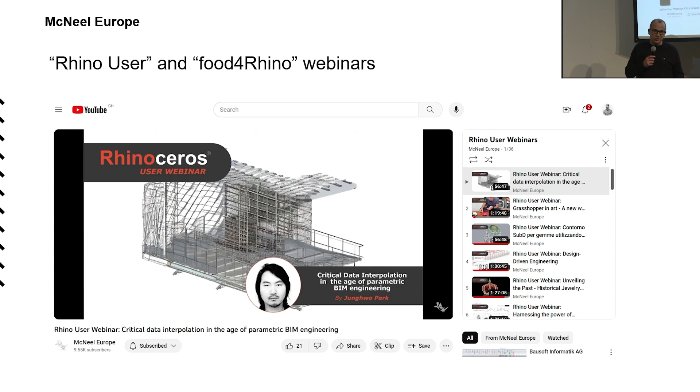And in October, we released Rhino 8. It has been amazing. During the last months, we've sold thousands of upgrades.

I'm not going to talk today about what's new, but you have this page on our website. There is an evaluation version. I hope you have upgraded already. If not, please contact Simply Rhino.

The load of tech and sales support is still very high because people are still installing the new version and they forgot about the previous version, or they're finding some bugs, or there are some issues with the graphic cards. We are still fixing many things here, but I think it's going very well, and people, in general, the feedback is very good.

Another milestone is that we have now more than 1,000 third-party apps on food4Rhino. So thanks also to the community of developers. Many of these apps are free of charge. Some are commercial, but there is always a trial. And yeah, it's still growing. I'm amazed because I don't see the limit here.

Again, food4Rhino is free to use, so you can upload there. Now, not only your apps, Rhino or Grasshopper apps, also 3D models, resources, books, tutorials, anything. And we are working on a new version of food4Rhino. There is a team in Barcelona doing food4Rhino that hopefully will see the light during the next year. Luis Fraguada, who was here 3 months ago, is now the product manager.

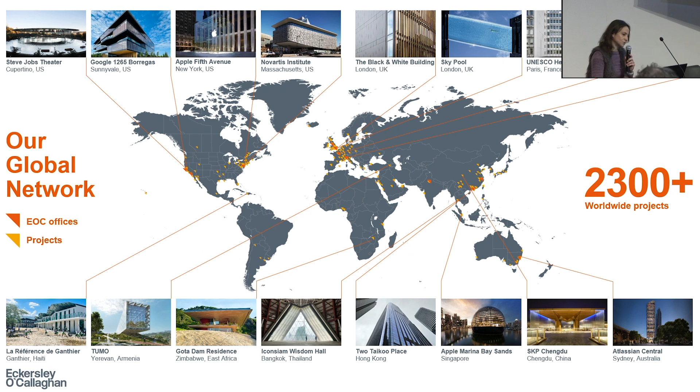Within these main teams, glass engineering, facade engineering, and structural engineering, we have 3 horizontal teams that together make us very special. I will talk this evening about our computational engineering team.

There are 30 of us, and you might be asking, you are 155, how come you have 30 computational engineers? The reason is because we operate in a decentralized manner. We have computational design leads in every single one of our international offices, and every group here in London, glass, facades, and structures, has a lead. We also have several champions working in their own specialisms, as well as people who are computational designers per se.

Because of our scale, we really need to focus on things we are very passionate about, and I'll mention some of them now. Integration is one of them. I think computational design per se is the big weaving thread amongst us, architects, engineers, designers in general. We've been working on a crescendo of projects providing all 3 services together.

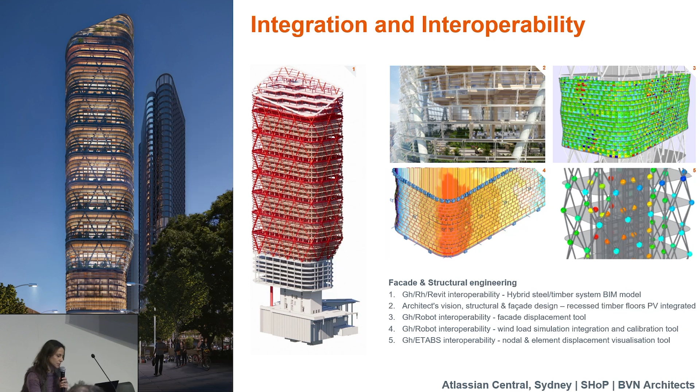It's been a year and something that I am in engineering now, and I understand how important interoperability is, because simulation is usually not done in Rhino, it's done somewhere else, and we've been focusing on connecting all these other platforms. We've been working very closely with our sustainability team, empowering them with several tools.

Some tools go from early design stages when things are still unsettled in Rhino and Grasshopper. When things start solidifying, we move on to Revit and similar tools, tracking embodied carbon and whatnot. Recently, we've developed a new tool for the facades team as well, accounting for embodied carbon and U-values.

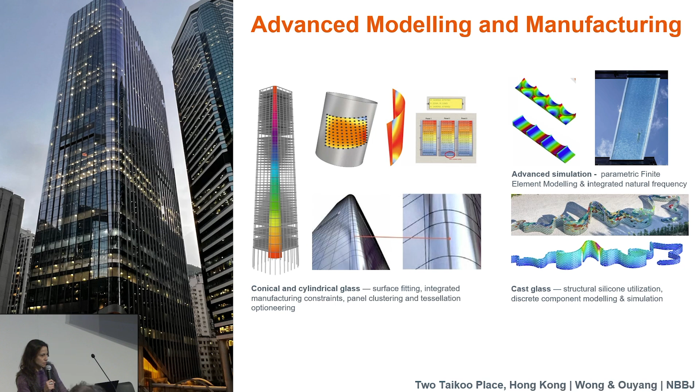Of course, our tradition in advanced modeling for glass has brought us to a plethora of tools, particularly focusing on parametric advanced FEM analysis and advanced manufacturing for glass and more complex materials.

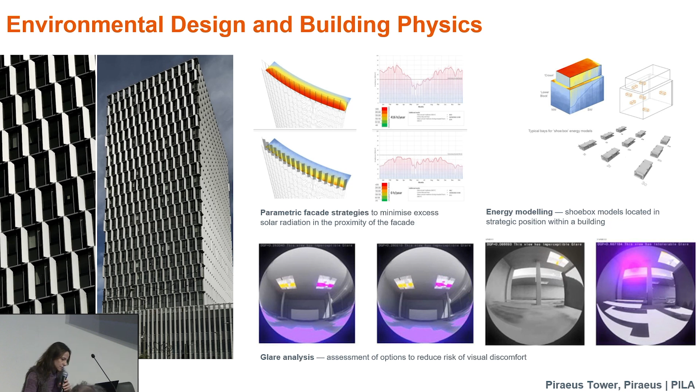And of course, computational design, we provide tools and increase the services of the company as a whole for our clients, for our demands. The facade engineering team has a wonderful team that's looking at building physics and the matters of environmental design and operational carbon and whatnot. Computational engineering and computational design go hand in hand with computational research and innovation.

Here are 3 projects that I picked for tonight. We are working with topology optimization as a means, not as an end, integrating it into more traditional design engineering workflows. We have been researching advanced robotics for additive manufacturing of facades, as well as finding forms for the most peculiar load cases. So this is a little bit about us.

So moving on to the Grasshopper user meeting. I decided to connect the dots looking back, and for my birthday I got, as a gift from 2 of my friends without speaking with each other, a book. I thought I may as well read it. It's the Containment Manifesto, I believe, from Mustafa. I'll also go back to 2016 for Pedro Domingos, The Master Algorithm, and to the mid-80s, Donald Schoen's The Reflective Practitioner.

So the journey through these eyes is much easier because I can just access my memory, but I am keen to hear about your own journeys on computational design.

So here we are in the morning in 1997, rushing to the office to get a computer that had Windows installed to pick up a license of AutoCAD 12. Otherwise, you would be left with the machines that only had 11 on DOS. AutoCAD 11 as well as AutoCAD 12 had 3D, and it was very clunky and very painful.

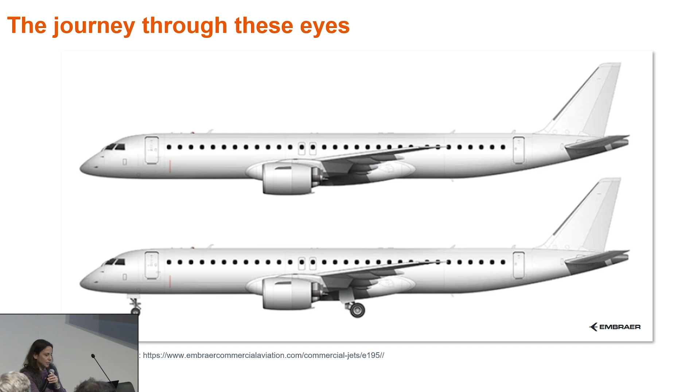So I embarked on this journey with a bunch of aerospace engineers and an architectural intern. They were probably asking, what's she doing here? They were using something called CATIA. CATIA was quite interesting because it had something called the sketcher, where you basically design your parametric constraints in 2D.

And you flip back to something called the CATPart, where you actually have your part, and this part is an actual file in the computer. The combination of several parts forms something called the CAD assembly, or the CATProduct. If you make changes to one, they cascade onto the other, and everything is amazing and parametric, no more drawing over and over again. The problem was that there was no architectural office that could afford a license for this thing. It was only at the uni lab that I could find a license to use it.

So I went on to some darker ages using 3ds Max, but 3ds Max had something quite interesting: procedural. You have the modifier stack, right? So you make modifications at the beginning of the tree, and they cascade down all the way to the end, somewhat saving time and actually inheriting things and making things a little smarter.

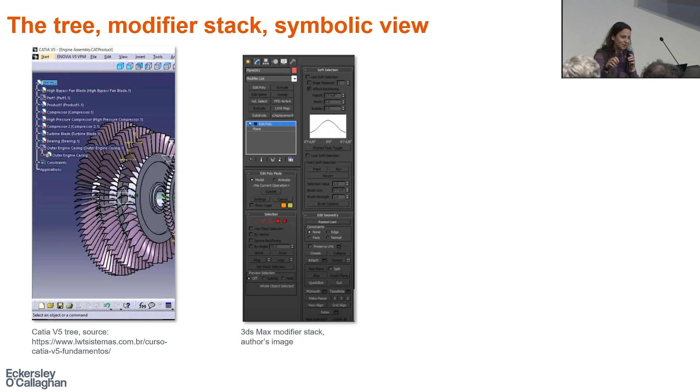But things in my life were heading to the UK, and I could feel that I was going to end up in London. So I started researching what CAD software they use there. And I realized that in the UK, we drink a lot of tea, so you had to use something where you can hold the cuppa with one hand and click away with the other. And so it was MicroStation.

On top of MicroStation, there was this thing called Generative Components. GC had something interesting called the symbolic view. You would drop things on your parametric model, and a node would appear in the tree. In the version I used, you couldn't do much except move the nodes around when they popped on top of each other, but you could see the parent-child relationship. It was also somewhat procedural, with a transaction file where you could play transaction by transaction, enabling or disabling some. So it was quite powerful, as it was painful. But it had some sort of rigidity to it.

We were designing the wings of Zayed National Museum in Abu Dhabi, in my previous home, and we found a big problem, a deal-breaker problem. Unfortunately, we had to start modeling in other platforms, and of course Rhino was one of them. It was the first time I encountered this.

Freedom! You have a canvas, and you can pop everything onto it. You have to really think responsibly about a parametric model, but you can think creatively about it at the same time.

We would report issues to David in the morning, and David would release another version in the afternoon. It was incredible communication. This is where I felt embraced by the community of Rhino and the forum and whatnot. That's why we're still here tonight, I suppose.

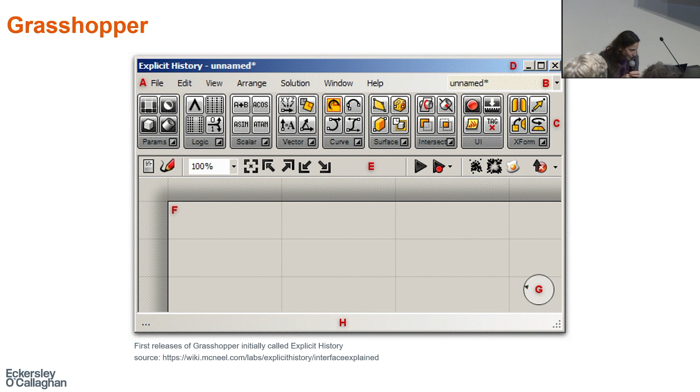But there's something to talk about here. Now, the fact that everybody's contributing, everyone finishes their PhD thesis and pops another plugin out there, and now we have everything everywhere, because everybody's connecting one platform to the other and to the next. Every single startup that comes here comes with a promise of bringing us together. And there are so many options that even in the same office we have different workflows. So what comes with the promise of bringing us together—isn't it taking us apart? Just my food for thought for the first one.

Now there's an even bigger problem, because now we have everything everywhere and we have AI. I want to talk a little bit about Domingos' text. Domingos classifies these groups into 5 tribes: the tribe that simulates what happens in the brain, the tribe that talks about evolution, the logistic tribe, the probabilistic tribe, and the analogizers. I'm pretty sure a lot of people in this room have written one of the algorithms for a particular tribe without even knowing which tribe it belongs to—though some people know more about it. But this is the situation we're in at the moment.

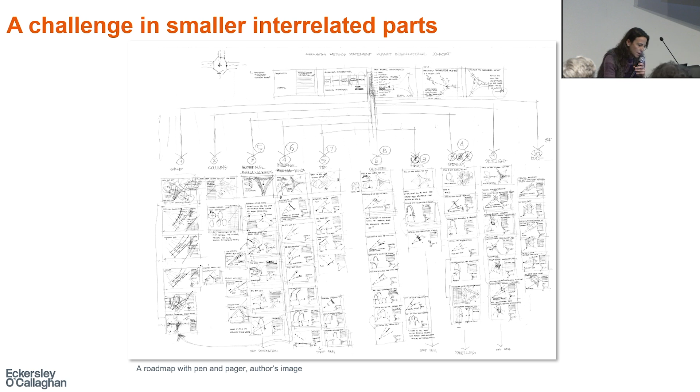In the beginning of this document there was something called the diagram of dependencies. Here I make an analogy with UML models, particularly the class diagram, and even the peculiarity of the composition links, which basically divides a package into classes and creates the interdependencies between classes.

The beauty of this is that you can identify parent-child relationships, and you can create checks and bottlenecks to check whether the AI is not hallucinating, whether the simulation by the engineer came correctly, whether things to manufacture are going in the right direction. I think the diagram of dependencies is quite an important part of the process.

I just want to finish with the happy moment when I saw David in the workshop last year, showing these two things, the shouter and the listener, and indeed the diagram of dependencies. Now we have dependencies between files, and we can establish much easier checkpoints. In this world of interoperability, this has a huge key role. So I'll leave it there. Thank you.

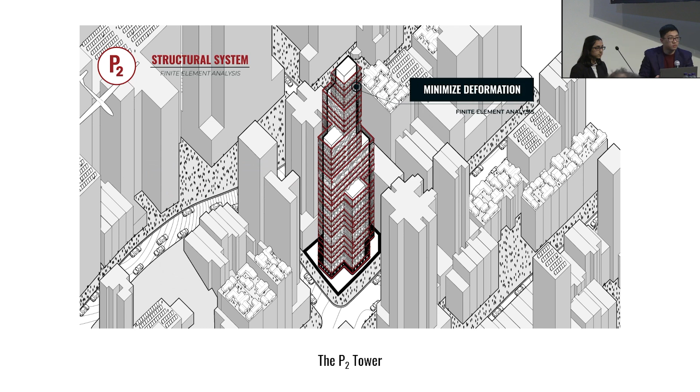The design of the P2 Tower was really driven by four interwoven narratives, which followed this changing needs of a family unit over time. Through these narratives, the P2 Tower explored how shifting social interactions could facilitate spatial changes. This flexibility was really achieved by employing a series of computational tools, such as multi-objective optimization or biomimetic principles. By using social interactions as a driver for design, we were able to distribute public and private spaces vertically throughout a housing tower.

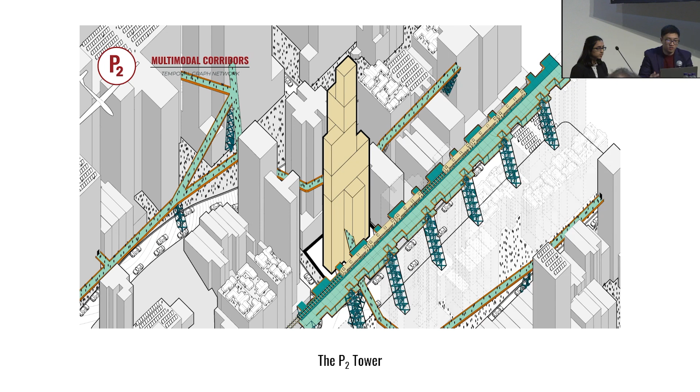Our thesis also looked at this idea of sociability at varying scales, developing a series of pedestrian pathways and multimodal corridors connecting parts of Hong Kong throughout the city. Throughout this thesis, we really aimed to address the dual issues of densification and ever-changing sociability by designing this interplay between public and private spaces that always transformed with its residents over time. So in order to achieve this, clearly defining... let's play this, okay.

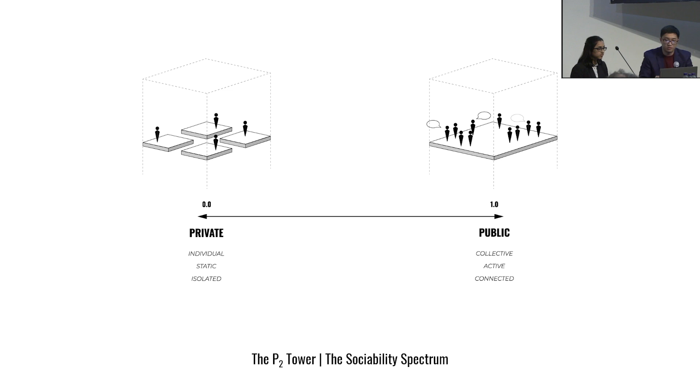Clearly defining these terms, public and private, were really critical to the development of our thesis. So in an architectural setting, we were looking at these ideas in terms of sociability, or how likely people are to engage with one another.

Based upon this notion and existing research, we developed a system which enables us to quantify the sociability within a space, particularly as it changes. This enabled us to adapt a space to meet people's changing needs over time.

The system was based on a series of measurable parameters within an architect's scope. Here you can see how some of those are calculated or measured at the scale of a building, but it could also be adapted to smaller or larger scales as needed.

This sociability spectrum, as we called it, really was the driving force behind our thesis and later underpinned the development of Hive, as it enabled us to quantify those social interactions, the sociability of the context, as a driver for design.

As we employed the sociability spectrum within our thesis, it was necessary to understand, quantify, and really leverage these social interactions in order to design.

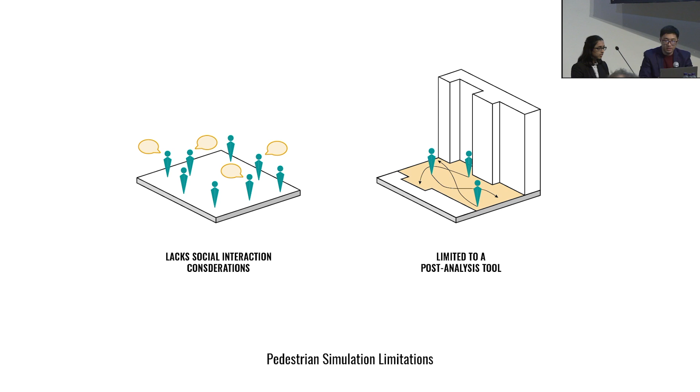However, we found that there weren't really many tools out there which sufficiently met our project's needs. A lot of the existing pedestrian simulations or tools that existed lacked any consideration for social behaviors. Beyond that, they were often only used as post-analysis tools rather than generative ones.

Knowing this, we developed Hive, which stands for Human Interaction Visualization Engine. Hive is a pedestrian simulation plugin for Grasshopper, which leverages human interactions for generative architectural design.

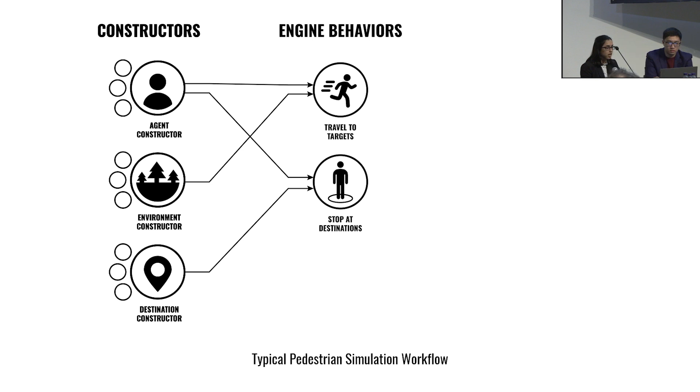To understand why Hive is particularly unique, let's take a look at traditional pedestrian simulations. Most simulations begin with a series of constructors, some versions of agents, environments, and destinations. These elements are then initialized and employed within the algorithm's main engine to actually simulate the pedestrian behavior. Typically, these behaviors will be to travel to certain destinations and stop at places along the way.

And finally, the most important part of simulations is output data, which will typically relate to some sort of agent movement and some sort of visualization in heat map form.

Hive implements all of these base functionalities, but introduces a third social interaction driver of design. This functionality is not only applied to individual agents who have tailored social abilities and requirements, but it's also integrated across the entire environment as well, providing the ability to define global social parameters and seasonal adjustments.

Hive facilitates these social behaviors on multiple scales using geometry and data which are particularly tailored to that specific domain. Beyond that, the data coming out of Hive can be used as a generative tool in a feedback loop to continuously improve the given design.

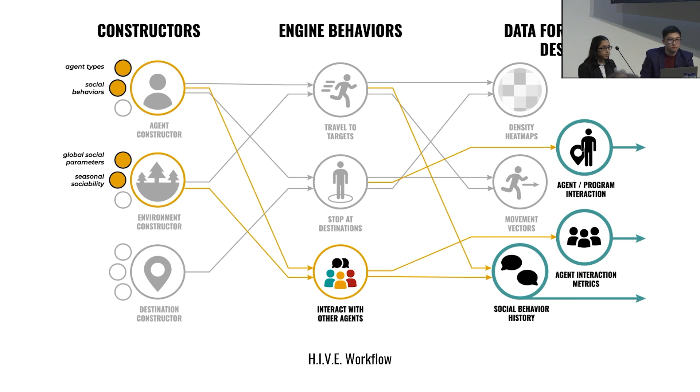So in doing so, Hive can empower the designers to leverage social interactions as a driver of design, which in a way humanizes the computational design process.

Now let's take a look at the actual functionality of these social interactions. As two agents come in close proximity with one another, their individual social levels are tested. The closer their values are to each other, the more likely they are to interact. Additionally, those with higher social levels are more likely to engage than those with lower social settings.

This probability is guided by global socialization levels, which determines the difficulty factor for that social interaction to occur. And of course, a small randomness factor is introduced to kind of mimic real-world behavior.

We've adapted this kind of social behavior for three specific simulations: a network-based, a cellular automata, and a physics-based simulation. At the moment, we've fully developed the first two methods, and we're in the process of developing the third one.

Each method follows about the same logic, but employs specific geometries, parameters, and data types which are specifically relevant to those scales. In doing so, Hive can leverage those sociability behaviors across different domains to cater towards multiple use cases and design scenarios. Now let's take a closer look at each of those developed methods to see Hive's specific functionality.

The network-based simulation is Hive's largest simulation engine, where agents can move and interact along specified network paths. At such a large scale, agents and destinations are defined as types rather than as individuals, and algorithms can then introduce movement and socialization based on agent journey requirements and access parameters.

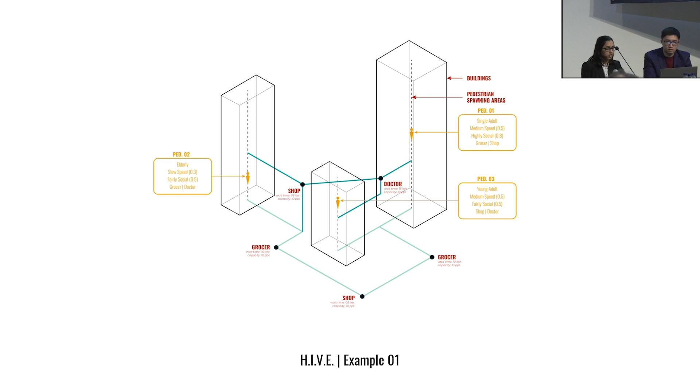Using this information, the algorithm can simulate pedestrian behaviors across the whole network.

Once the simulation is finished, Hive's output data can be used to facilitate multiple types of analyses geared towards different design goals. In the first example, we can compare several different types of networks to one another.

This may be useful when considering multiple design options for the same site, or a staged development of a specific design. In this example, we employed Hive during our thesis project as a tool to select the best performing network from a series of optimized design options.

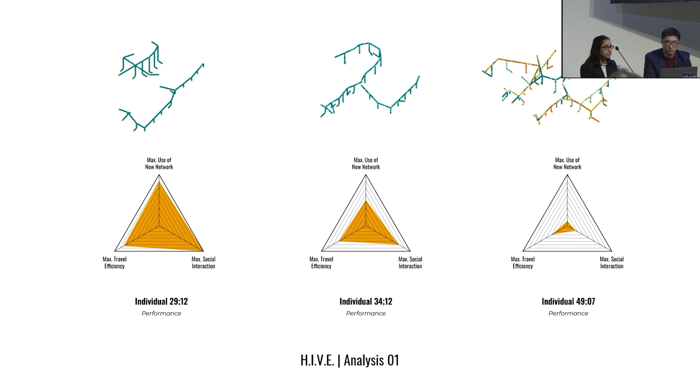Here you can see that all three were supposed to be highly performative individuals from our previous objectives, but when we integrated Hive's social behavior functionality, we can see they're actually not the same — in fact they're very incomparable. So we can see how Hive's additional parameters help benchmark designers to specifically tailor their designs to human interaction as a driver of that design.

In the second example, we can compare the same network across multiple settings. This may be useful when changing community dynamics or if you want to simulate social adaptation over time.

This example is also from our thesis project, and in this case we used Hive to understand the effects of variable social behavior on very simplified networks.

This can help in a generative design process where you run one Hive simulation, understand the output data, and continue to optimize your designs.

Alongside the network-based simulation, we also have the cellular automata simulation method, which we can take a look at now.

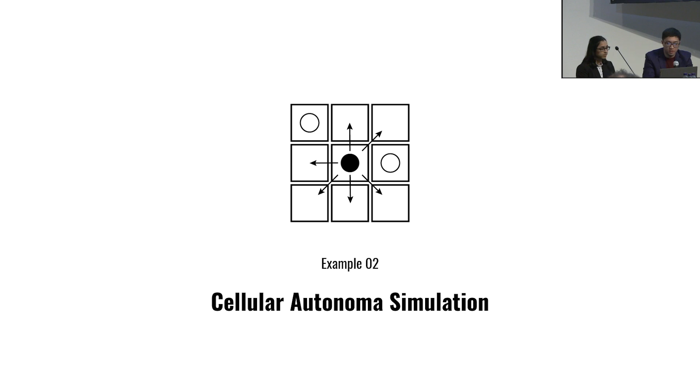As compared to the network-based simulation, specific destinations or paths of movement for the agents are not specified as inputs. Instead, this algorithm moves agents based upon their specified social levels in respect to other agents, surrounding program, and the context, with a touch of randomness as well.

Through such a method, the simulation showcases how programmatic arrangements can encourage opportunities for social interaction within that space, or how agents may move within a space.

Specifically, the cellular automata simulation operates on a medium scale scenario by introducing spatial characteristics to the agents, the program, and the context. Agents are defined by a sociability score and a prevalence within the simulation.

Program spaces are randomly distributed throughout the environment. Combined with the sociability of the existing context, this program helps make up the overall environment of the simulation and influences the way agents move according to their proximity.

The agent's movements are determined using a 9-square grid, where cells adjacent to the agent influence the probability that it moves in a particular direction. As demonstrated before, these probabilities are determined by the proximity and the relationship between the sociability score and whatever exists within that adjacent cell.

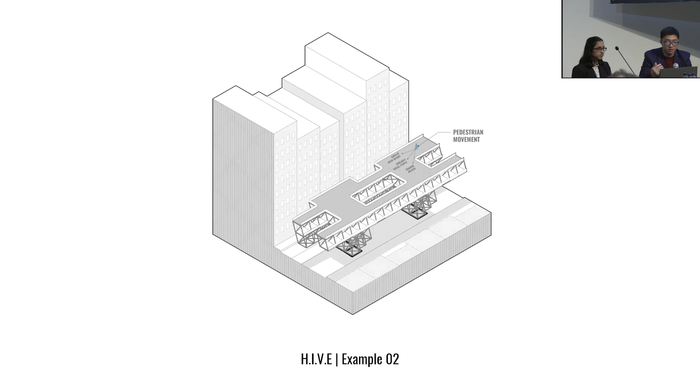I mentioned earlier our thesis, we developed a series of multimodal corridors which connected parts of Hong Kong. We employed the cellular automata simulation method here as a first case test scenario to design context-specific program arrangements along these corridors, which was able to respond to different urban scenarios by weighting the program and context based upon open source data we obtained, as well as using that sociability spectrum I introduced earlier.

Through the simulation, we were able to understand how a particular program arrangement along this one site was not necessarily conducive to social interactions or moving people through the space. You see in that image there, there's a high concentration of people spending time towards the southern end of that space.

By utilizing that output data we were able to get from Hive, we adjusted the input parameters of the programmatic arrangements to simulate how this space might adapt over time, not just an initial case scenario. The resultant design showed an improvement across the metrics when we analyzed it with Hive again. Iterating that a third time, we were able to generatively develop a well-suited programmatic arrangement for this section of the multimodal corridor, which performed well in terms of social interactions and programmatic use, and specifically responded to the urban context it was in.

You can see how we could continuously use this methodology and system to respond to changes in the space over time.

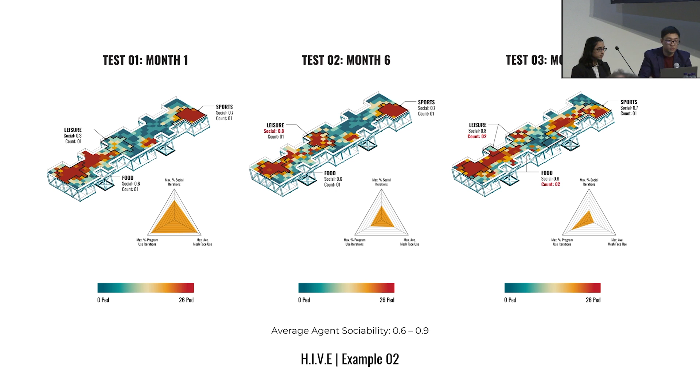Other things we're working on adding into Hive are things like agent recognition of repetition as they interact in the space, group movement of these agents, clustering in spaces, or how their movements might differ when they're no longer individuals, and also looking at how these agents' sociability might change over time, and in what ways that might affect the simulation.

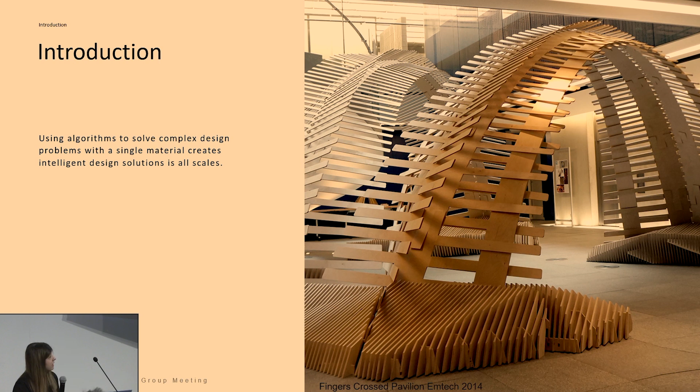Until I met the founder, Dr. Dan Plant, who is the founder of the company where I work today, called Rheon Labs, which I'll tell about. I'm the head of design at Rheon Labs, and I also teach at Imperial's Dyson School of Design Engineering.

So I suppose the purpose of today is to show a bit what we do with Grasshopper and our current workflows. But to put things in context, because I don't think it's quite straightforward, ultimately what the company does is it has a technology, effectively metamaterials designed with computational design, and it's this technology that's applied in sports engineering. It's an ingredient brand—like Gore-Tex—so we partner with companies like Adidas, for example, and enhance products.

Technology currently comes in 2 formats, which is 3D injection molded and in film, and I'll show you the case studies. But I will also explain first a bit more about the technology, because I think it's important to understand it. That's basically what Dan had when I met him - this reactive polymer, which is strain rate sensitive. It responds to forces depending on the speed and loading you apply to it.

So you can imagine if it's a molded stack of material, the faster and harder you hit it, the stiffer it becomes. The same applies to other types of energy - if it's stretched, the faster you stretch it, the stiffer it becomes. So that's aspect one.

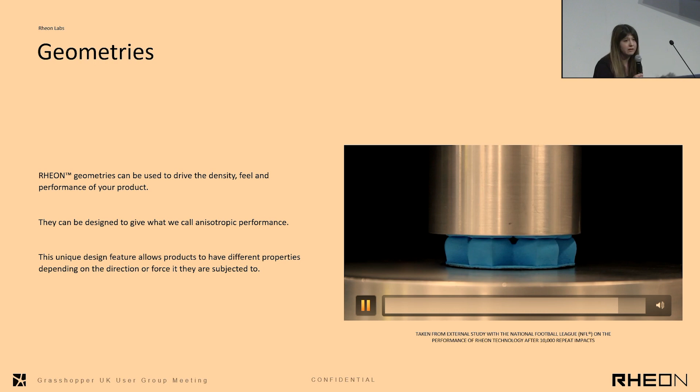The other aspect is the geometries and computational design, because that's not just an added value - it actually amplifies what the base polymer does. In this example, you can see these castle structures are designed to have a soft initial response, but as the loading increases, they become stiffer. You can see how that's useful in applications such as helmets, where you'd have soft day-to-day use, but if you, God forbid, smash and crash, the material becomes stiffer and absorbs the impact better. So that's the essence of the technology.

I'll show a couple of case studies of how we applied this and how Grasshopper and computational design come into play. In the first example, we talk about body armor and protectors. If you're not a sports enthusiast, normal body armor protectors are effectively a big stack of materials - you have maybe a plastic shell on the outside for scratching protection, a thick layer of energy absorbing foam, and a thinner layer of something designed for comfort.

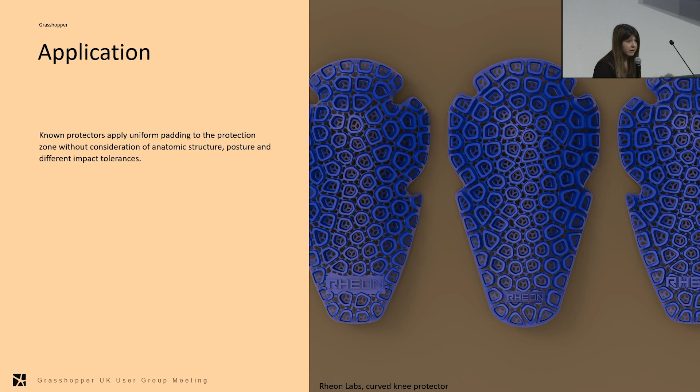So a lot of materials coming together to create this. The issue is, A, you're using 3 different materials - that's not very good for the environment, and generally not the smartest way to do it. But also it treats the human body as if it's all just a single shape that doesn't have different features. It doesn't differentiate between where your bones are or where your soft tissue is and how you're actually going to use it. It's quite generic.

That was the first application we did, now over probably 7 years ago, where we said let's just rethink that because we can do it a lot better. So we took a lot of body scans and tried to identify - it's quite repeatable where you identify, for example, the closeness, the distance to the skin in terms of bones versus joints versus soft tissue. But if you also consider the variation in different populations, or predominant areas of impact or scraping, you start to add a lot of layers.

Ultimately, and you'll see this as a repeated theme, we use a lot of our own analysis, creating heat maps from that analysis, and then using that to drive something in the design and geometry. So here, we interpolated all these maps to create the boundary area and how that should differ, and then generate the geometry based on that.

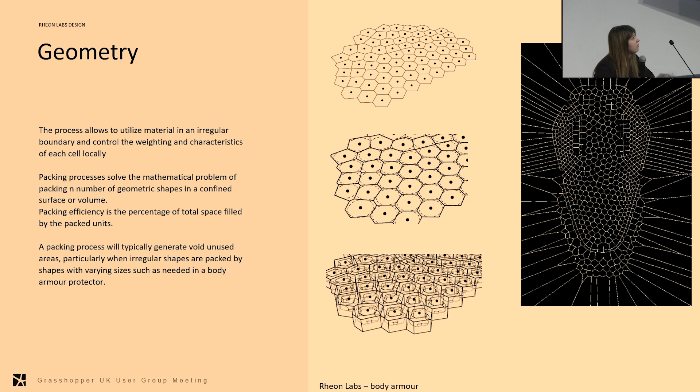There's obviously the very popular Voronoi, but in this case I think it was particularly useful for us and still is, because ultimately we utilize a quite irregular boundary populated with cells according to a complex range of parameters. We utilize that boundary to the maximum so that there's no cell that is the same - each cell is individually tailored to the specific area it's designed to protect.

There's a degree of other analysis we do - there's a lab, not Rheon Labs, it's actually a lab in Battersea. But a lot of it comes from empirical test data. In this attempt, you can see us trying to map how body armor goes through rigorous testing standards, where you put it between 2 metal anvils, drop it at different energies, and record the transmitted force. So this is us trying to map that transmitted force and therefore what it should mean in terms of characteristic geometries.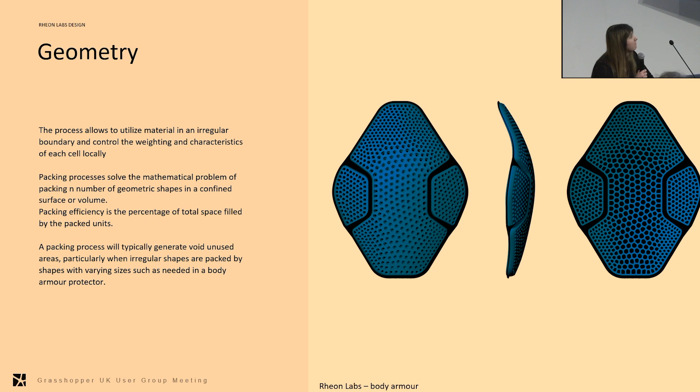And the evolution of these parts, I suppose today you can see that in actual 3D. The injection molding process ultimately uses 3D printed tools, but the injection molding itself is done traditionally because the material is quite soft. You can imagine we have a degree of freedom with undercuts we can pull out, but I wouldn't say it's unlimited. We do have one-off tools that are now door stoppers, but you can see the variation in cells and how the final parts tend to look.

But the ultimate result is these protectors, whether for motorcycling or other applications, tend to be a lot thinner than your average market ones, a lot more breathable, and a lot lighter. And that makes it worthwhile, I suppose.

Let me show you other types of workflow we do. It's quite similar, but I call it data-fying the comfort. A lot of the times the parameters we're trying to use or understand are not well understood, or they're not numbers at all - they're effectively human-centered design factors.

So of course you can optimize a helmet or body armor to be as protective as possible, but there are aspects that are interconnected and more subjective. So for helmets, for example, if your helmet doesn't fit you well, it actually won't protect you well, just so you know.

The way these products are made is quite traditional, at least in many cases. So for us to create our own set of rules, we say, give us all the 8 different sizes of helmets you make, and we start taking scans or head forms from testing, trying to analyze the distance between the head and the inner surface of the helmet, trying to identify hotspots. This also gives us a way of deciding where we can put our technology, because you can imagine it's an added bit.

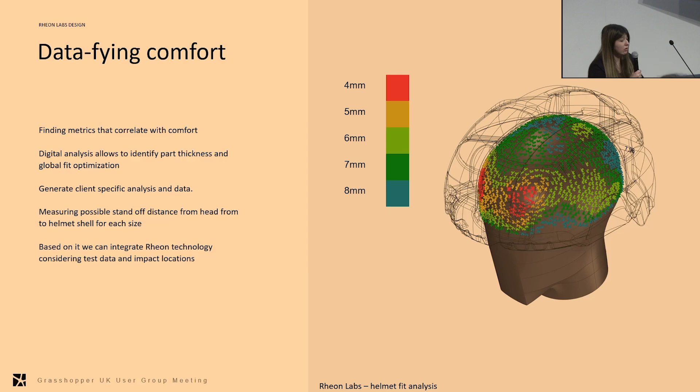It's not always the case. A lot of the times - and that's part of the difficulty of being an ingredient brand - it's: here's our product, we're not going to change it, but make it amazing by adding your technology. And that's quite difficult because no matter what you do, you're adding material.

So therefore, it's quite the trade-off - having this more intelligent material and more intelligent design can sometimes disappear.

Obviously, that's part of the workflows we use, also in terms of Grasshopper. We try to identify impact directions, which are normally instanced. And obviously in reality you can fall at any angle, but you try to map the primary ones, while at the same time identifying possible pain points for the user.

And therefore, as a result, what could be the design within the existing real estate, so to speak, because the footprint we work with is quite limited sometimes.

Something I forgot to mention about the body armor earlier - the geometry aspect of it is crucial, because you would think there's a linear relationship. If you take just a solid polymer, not designed as a block versus one with geometries, you'd think the solid one performs more because there's more material in it. But in reality, the geometries enhance the way the polymer works.

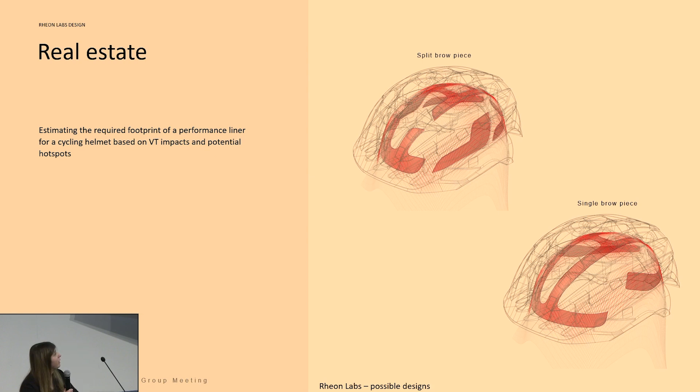Often when we test 20 different designs, you wouldn't see a relationship whereby more material means better performance. And that's, I think for me at least, one of my big aspirations - when we achieve more with less material.

Different case study. As I said, we do have applications in film. It all started before the previous Olympics, looking at athletes running on screen and seeing this muscle wobble. It became this hypothesis that what happens as you run and hit the ground is your muscles go out of plane, and that vibration is wasted energy. So if you actually redirect that specific type of vibration, you make more out of your own body and therefore become faster and better.

A lot of study and research went into this. We then partnered with a couple of universities. We filed our own IP on this. It was quite a journey.

From a computational design perspective, where it often lies is in this kind of 3D, 2D, 3D process where we try to map the muscles and understand where we want the technology, unwrap it onto a flat pattern of the garment, make a design, and then wrap it back again. That's kind of the common workflow.

I'm supposed to show a bit more advanced progress of it, where we try to integrate how people move, because ultimately compression garments need to be compressive to a certain level, but they cannot be overcompressive. So considering how you flex. But yeah, this is one of the more advanced designs.

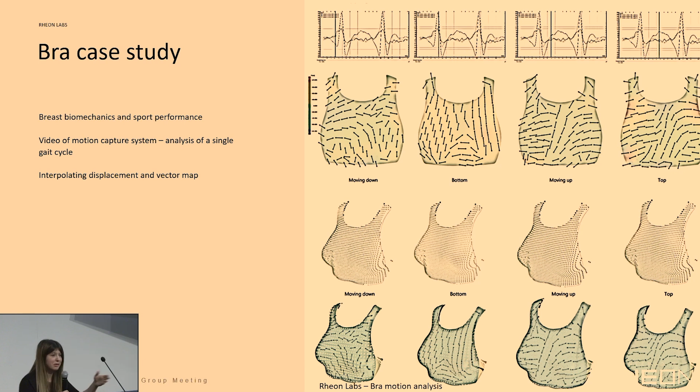In my very naive first attempts, I thought we could do live 3D scanning at the same time as motion capture. There's probably a system that could do it, but with the facilities we had, the 3D scanning is a lot slower, though still valuable data came out of it. Maybe today, when I have more time, I'll do something more valuable with it.

But I suppose the repeating theme here in terms of Grasshopper is we constantly try to create our own analysis tools with data that is not necessarily very accessible to us, through different aspects.

Here as well, the idea of trying to create data from comfort. This is even harder to understand than helmets, but a lot of the time a bra could just be not the right size. So differentiating in the feedback what comes from fit limitation and what actually comes from technology is quite hard, or from design changes you could do.

But what we often do is just create a lot of maps that drive the design. That could be either something we've drawn and mapped ourselves, or trying to take a whole list of subjective data we capture online or from users, and then turning that into data.

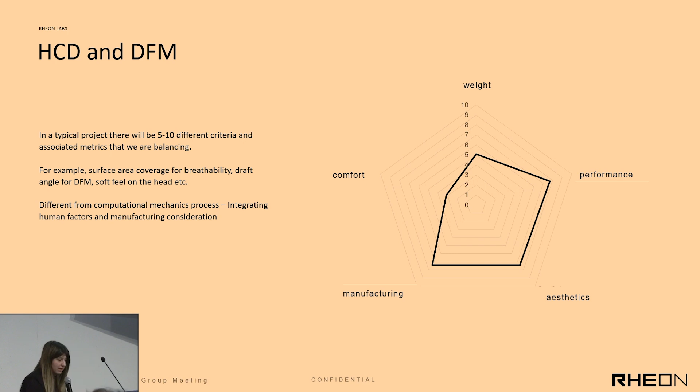As well as human factors, sometimes the things that affect the design are constant areas of friction on the skin, or people saying they didn't like the way their behind looked in it at the gym, things like that. It's sometimes hard to sell, but we try to quantify it effectively.

Just to show an example of the type of thing that ultimately comes out of projects like this—there's obviously a lot in the pipeline I'm not allowed to show. If you have more thoughts, in the more informal part of this evening I have my colleague Kami here with me, who also works at Rheon, and a lot of the things you've seen are things he designed.

I suppose the presentation wouldn't be complete without two other things, which is my teaching hat. Talking about my student work, since I started the module I hacked a module called Advanced Industrial Design to be about computational design, but they don't allow me to change the name. Students always amaze me with their insights and the things they try to do. It's quite a short module, coming from a school that still relies a lot on tools like Fusion, so it's quite hard for them at first to grasp Rhino and Grasshopper, but I think increasingly I see more and more students do it well.

A lot of them try to link some human motion with an output in Grasshopper. In this project, the student tried to link a hand object for fidgeting, basically with the way your hand moves and fidgets, which was quite nice.

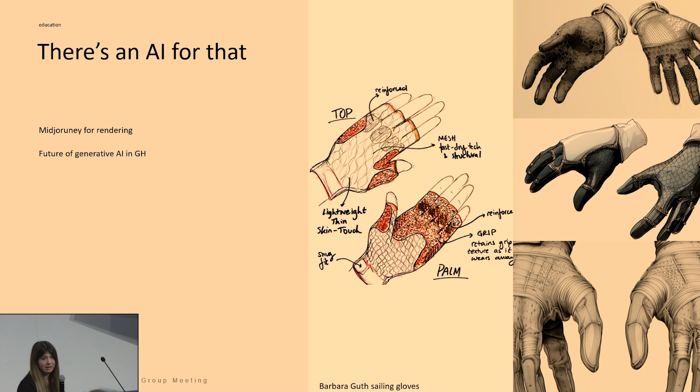To summarize my thoughts on this, we are definitely in an area, as has been discussed, where a lot of the things we're trying to do are starting this kind of conversation where AI can shorten some aspects for us. In the early steps of introducing things like Midjourney to students, there's fairly good use in terms of quick renders or initial ideations. The admin system was probably a bit challenged by how you pay for them, but generally I think it's quite promising, and I'm sure the day where we use it for things like prompt-to-code is very close, if not here already.

It says questions, but I know they come at the end, so I think that's pretty much it.

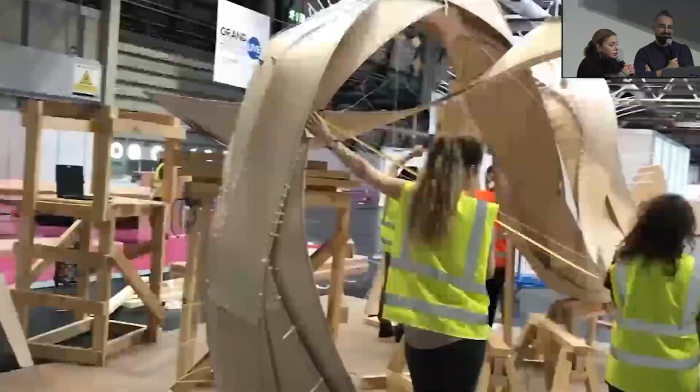For more than 20 years in EmTech, we have been exploring different lightweight material systems, and ultimately it's all about experimentation and about the research process. We've been experimenting with novel design processes, computational methodologies, building systems, different material systems, and so on and so forth. All of our computational tools, techniques, and workflows are calibrated from physical experiments.

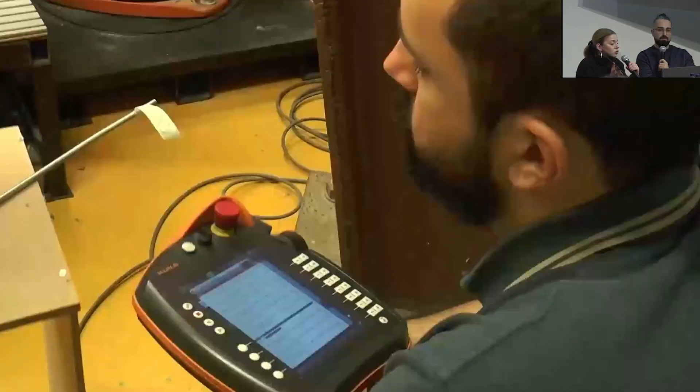You're seeing here various different experimental projects over the two decades. We do believe that it is impossible to build on knowledge from only one project. So in each project, we focus on a specific computational workflow, a computational pipeline, which is coupled to the physical experimentation process as well.

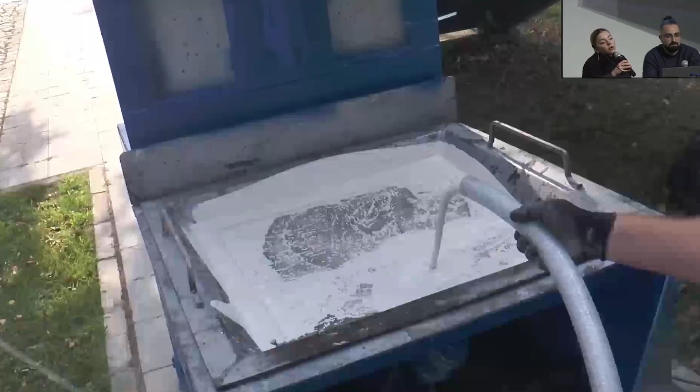A very important part of this process is the studio and the atelier tradition, which is really about the human aspect. We like to work collectively in studio with our students and develop various computational workflows that are coupled to physical experimentation. In EmTech, we have a long history of building, and one of the integral parts of these build projects is understanding how to transfer information between computer and the real physical world. There are a lot of pipelines we utilize in a studio, but one of the most important is Rhino and Grasshopper for both ease of use and its universality.

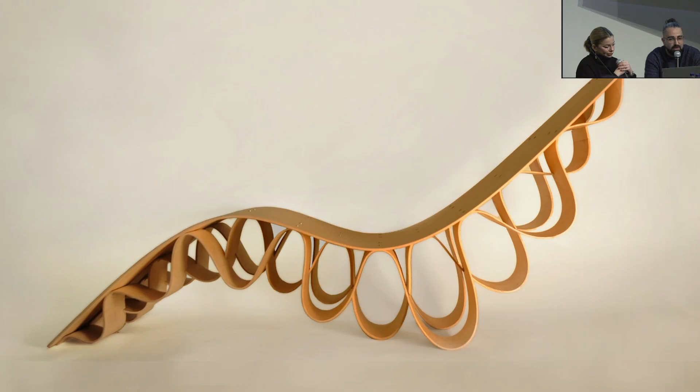One of these projects is the manifestation of these generative pipelines that we test in our studio. They are realized either through industry-led projects sponsored by industry partners from Buro Happold, Arup, to multiple different partners throughout the last two decades, or they are manifested in our students' thesis work. Through this, one of the integral parts is to bridge the gap between how material behaves physically versus when we simulate that digitally in computer.

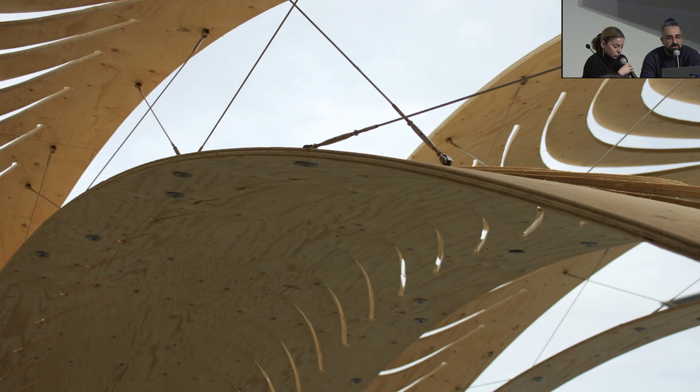These are example works of thesis works in EmTech, collaborations done with other institutions and industry partners. This particular one was done with ETH a couple of years ago. As you can see, EmTech had a long history of interest in thin plywood sheets and how to design and fabricate performative structures as lightweight as possible. One of the key areas to come up with such design ideas is to first understand how they behave prior to their built-up process. This link is facilitated through the computational pipelines that we explore, invent, and establish here in EmTech.

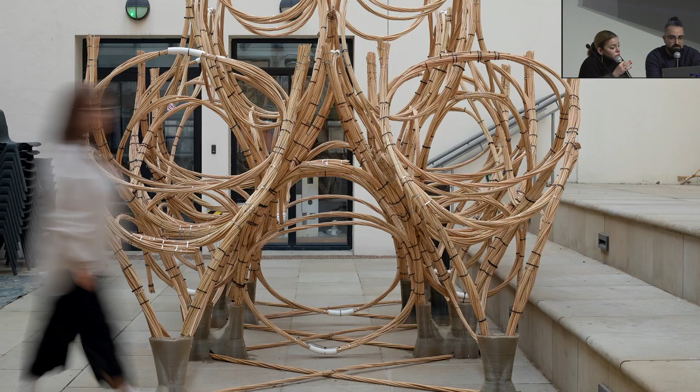Considering our history in working with lightweight materials, we have recently been more interested in biodegradable materials. Part of our research involves an international workshop called the D-Lab Visiting School, which takes place in London every summer for three weeks. This workshop is open to architecture students around the world, and our research themes between EmTech and D-Lab correlate with each other.

During this past cycle of the workshop, we worked with rattan canes. As you might know, it's a renewable and biodegradable resource, and we focused on creating a lightweight structure through the bundling of rattan canes. Why were we interested in this? Because rattan cane on its own is a very flexible, flimsy material, but through bundling and twisting, we can create more stiff objects or structural components.

That was the initial research idea, and as in every cycle of the workshop, we're interested in integrating generative design, material computation, large-scale fabrication, and robotic fabrication as well. We are going to go into this research agenda, which we are now developing further in EmTech Studio. As you might be aware, evolution favors the use of fiber-like or fiber-based structures in complex living organisms. Many of these fiber-based arrangements involve the alignment of long, stiff, or sometimes not stiff members or fibers in parallel formations in multiple layers.

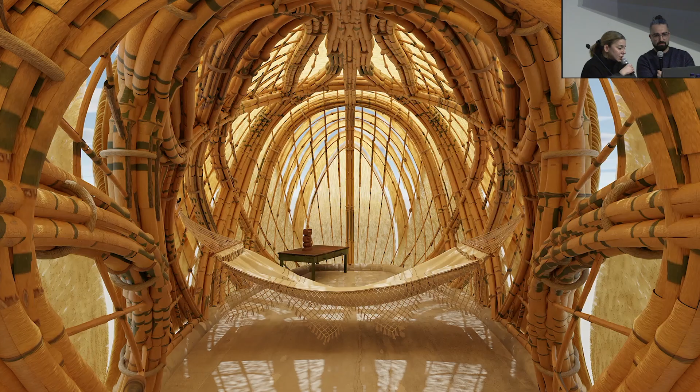In terms of the focus on this research, some of our students have been experimenting in EmTech as well. This is one of the recently concluded Master of Architecture dissertations from 2022 by Maxence Florence, Louis Bossoms, and Rodrigo. Their focus was on coming up with a multi-scalar design methodology to create a dwelling system in the Yucatan Peninsula.

So they mainly work with bamboo as a material system and how bamboo can be bundled in different ways to create structural configurations, which we will jump into in the final slides of the presentation.

To contextualize the research, we also investigated academic precedents, research-based precedents. The gap we identified was how could we further explore stability through geometrical and material investigation by using canes, and how can we create structural performance without the structure being supported by an external framework. So our main consideration was to create a stable structure made from very lightweight canes that can be bundled and twisted together, with a certain structural capacity.

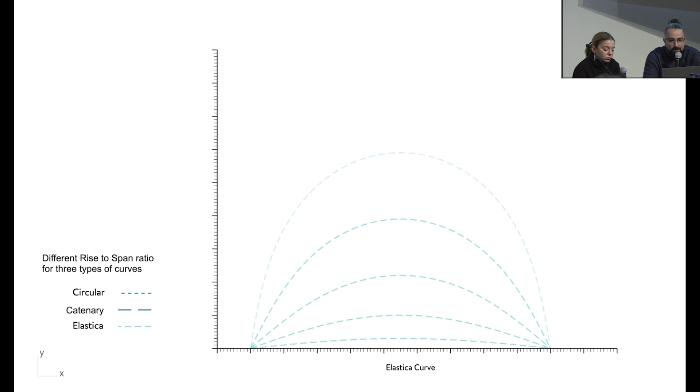Elastica provides three principles of curvature that can simulate the behavior of the material in the physical world when dealing with long, slender elements: circular curves/arcs, catenary curves, and elastica curves. Within these three principal curves, we started experimenting with how these curves could be achieved with the material we were working with.

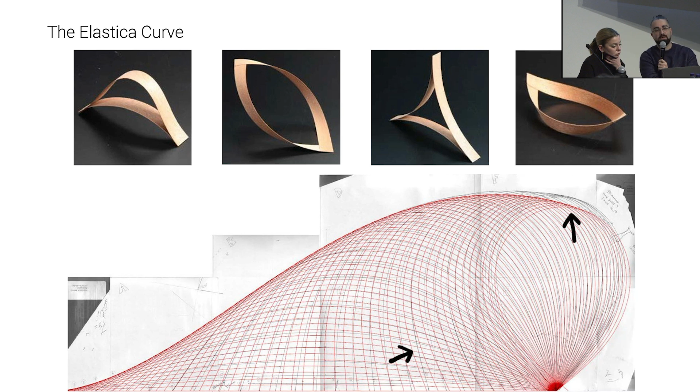Since this was part of the workshop, the brief was given to our students to experiment with long, slender elements, among which were also plywood sheets, to better understand how these physical behaviors could actually be understood and simulated in computer and digital workflows.

Building on this, there was an important principle we wanted to explore: bringing layers of material together. This is a very important equation when working with different layers. However, we wanted to push it further by removing adhesive when dealing with different layers.

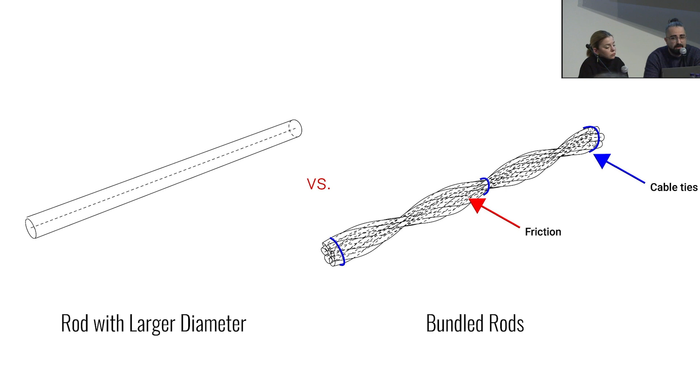We started thinking about what other ways could be implemented to bring these long, slender elements together and create variation and different bending behavior. A rod with a larger diameter might have better performance dealing with bending forces, but bundled rods allow for flexibility to create curvatures of various types. This was something we wanted to explore in the research this summer.

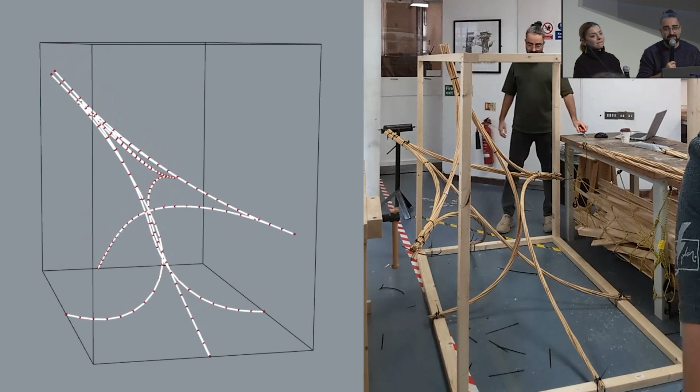So we created a real-life physics and Kangaroo simulation. For those familiar with the Kangaroo plugin - a fantastic plugin in Grasshopper - we had to make sure the pipeline and workflow we were exploring could actually correlate to what we get in real life. We wanted to understand whether the Kangaroo physics simulation could be, not exactly, but almost similar to the real-life events that could happen. This is me being happy that, oh yes, it happened.

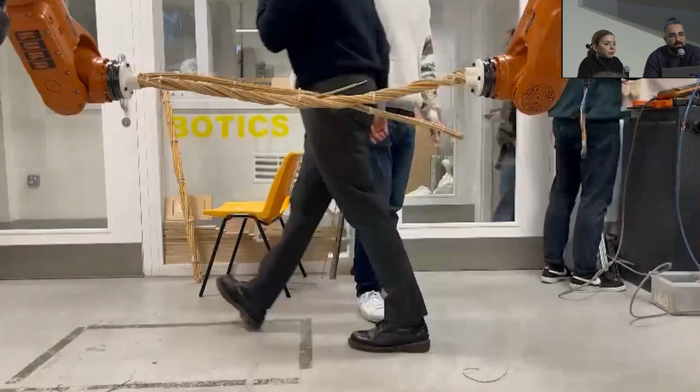One of the main and key areas of this physical experimentation is to understand where things fail. This is a recent video, but we did the same thing back in summer—we tested how far we can twist these with robots and how far we can bend them before they fail. These are important physical tests that could eventually help us calibrate and come up with a digital workflow that can be meaningfully tested.

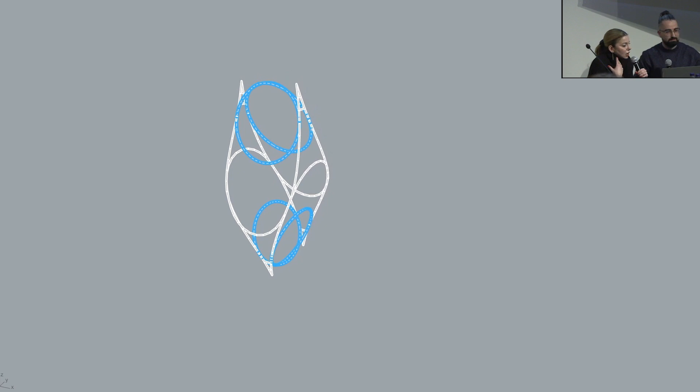All that student work and physical experimentation resulted in a basic component morphology that is prone to stretching in certain directions. So we decided to insert the blue circular elements you see, which act as stabilizers, enabling the stiffness of the component itself. And then there's the issue of rotation at the component scale.

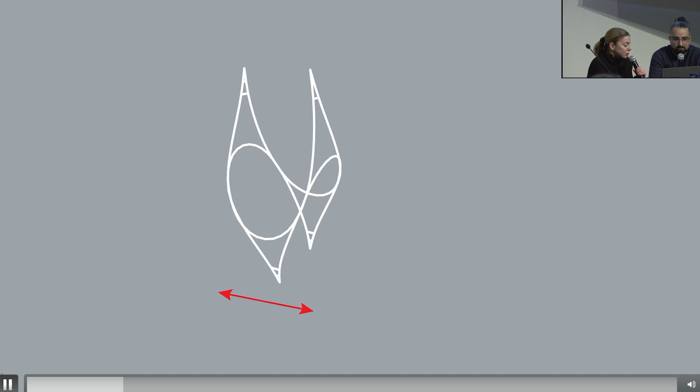So then we started looking into ways of aggregating this component morphology system, both horizontally and vertically. This component morphology is the result of a couple of weeks of research, and right now our students in EmTech are developing this morphology further to create a more spatial aggregation logic.

This kind of summarizes our entire computational and physical-based workflow. As Milad mentioned, we started with basic initial physical experiments, trying to understand if the physical experiment is actually calibrated to the Kangaroo simulation, correlating those two while also creating the material load testing.

One of the key ambitions of these physical and digital simulations was to extract a Young's modulus we could use for structural simulations. In research and academic papers, you can find different Young's moduli for different species of rattan, but because rattan is a natural biodegradable material, there are sometimes slight changes to those values, and we needed to ensure we were working with a value that's as precise as possible.

For that reason, we used multi-objective optimization, which Milad will talk about in a bit, to calibrate a coefficient that can be used in accordance with the Young's modulus.

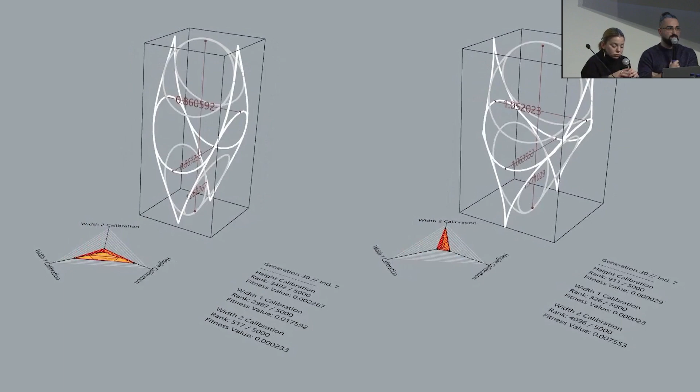One issue we faced: we got the Young's modulus and could simulate what we'd build in Rhino and Grasshopper, but unfortunately that wasn't the case, because these rattan cane reeds were extremely flexible and unpredictable. When we followed the step-by-step process of building, bending, and bundling them, we noticed a massive difference between the computer and the physical world—a difference we needed to overcome to move into the production pipeline.

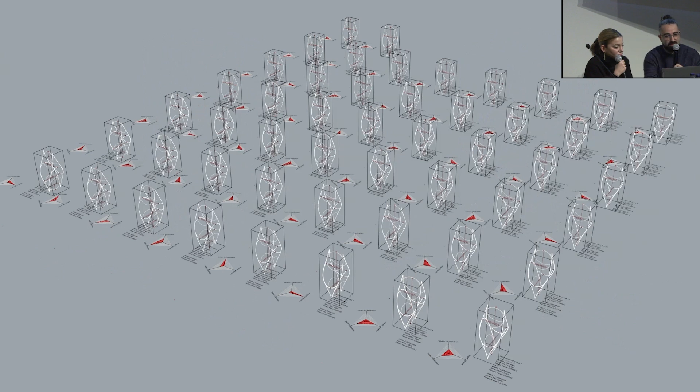So one key thing we did in this phase was come up with a series of coefficients to include in the physics simulation, to make sure what we simulate with Kangaroo and Grasshopper is as close as possible to real life. We did a series of multi-objective optimizations with Wallacei, coming up with numbers and coefficients that could be introduced into our pipeline to create what we wanted physically. We then used the resulting coefficients in our structural simulation.

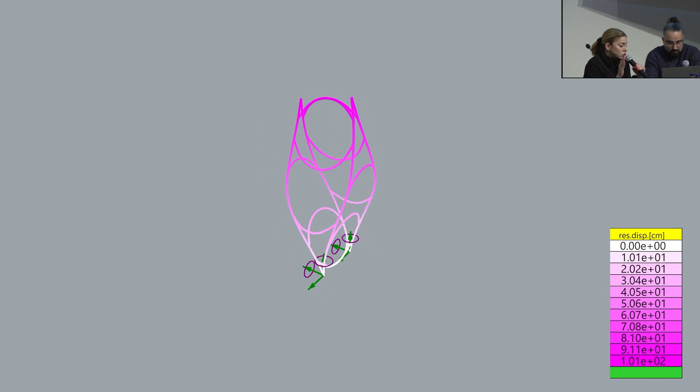So first we start with testing two types of modules. As I mentioned earlier, the module geometry and morphology is currently in development. At that time, we wanted to test two different modules with two different stiffness values, and we started with testing the buckling behavior of single modules in Karamba, using eigenmodes basically.

And then we went on to analyzing different aggregations of modules, applying both gravity loads as well as point loads, modeling the joinery, and testing what happens as we aggregate these modules both horizontally and vertically. This essentially sums up the entire process.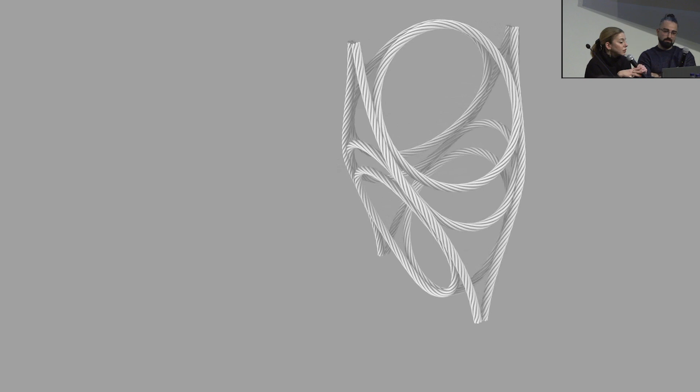We start with a simple component geometry, which is strengthened by those circular elements, and everything is bundled together. These components are aggregated in different rotations. This is also important for the structure analysis - they have different axes of rotation, which adds to their stability when they all come together.

And the final morphology that we get at the end of this stage, the component morphology, we thought of testing this as a demonstrator, just to build a wall basically. We said let's try to build a wall first with these components, and then afterwards we can develop this system into a more spatial structural system.

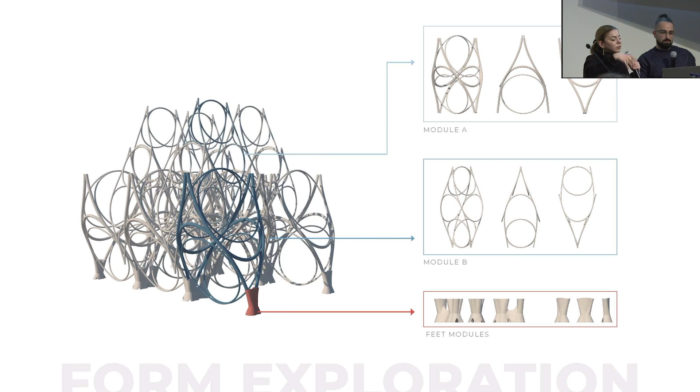As I said, this is part of the ongoing research, and right now we are developing this system further. This system is developed with rattan canes, which need to be imported, so we are also in EmTech looking into ways of working with willow canes, which are locally resourced.

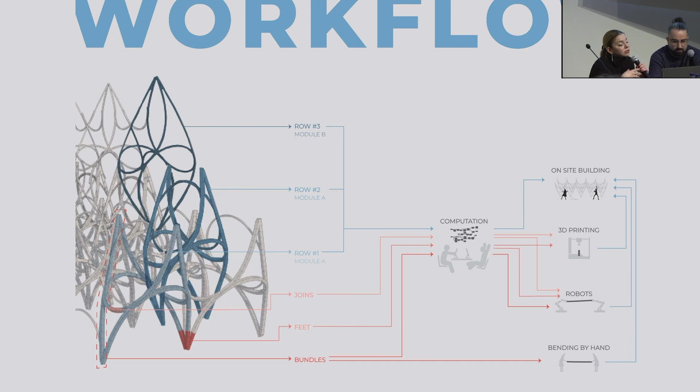And also what is important - the reason why we're interested in biodegradable systems, friction, and why we have tried to omit using adhesives, is because we are working around this agenda of respecting the environment and using as many natural materials as we can to create a structural system.

These are some earlier robotic fabrication tests that we have created. Our two robots at the basement can talk to each other, and we have created custom-built end effectors for different types of bundles.

One important thing to highlight is we are working with varying stiffness in different morphologies. So we work with bundles of, and here you can see how it fails, bundles of 7, or bundles of 21, bundles of 35, and so forth.

And of course, a very important reason why we use these robotic fabrication techniques is the increased control and precision. So right now you're looking at some of the joinery generation with the robots and with 3D printers.

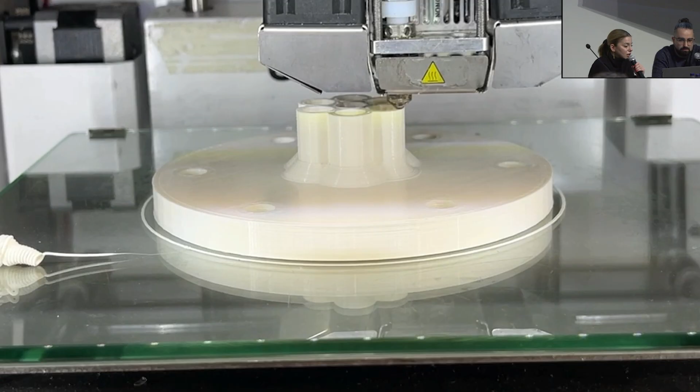What I'd like to highlight here is that these elements perform beyond just joineries - they also guide the assembly process through their precise geometry. So they are not just joinery elements; they are very helpful, as you will see in a bit, in helping with the assembly process.

And these are some examples from our connections - these are the base connectors that have been created through recycled pellets, 3D printing, and they have been filled with sand to increase their weight.

One of the key aspects of this project was to remove any need for adhesive. So the entire experimental structure was standing based on friction - both pre-tensed bundles coming together, the feet and the base and the connection nodes, and also the way that they interlock to one another.

Through this process, it actually helps the sequence of assembly, and this sequence of assembly was very straightforward. However, at the end, when you look at the structure, it was quite hard to understand and find out where the components are. This was one of the key areas of the project - to design and fabricate a modular system through which the final aggregation tells a different story.

That's us telling the story now. So this is a very quick time lapse - it covers, I believe, the final 3-4 days of the assembly process.

As you can see, everything is unflattened at first, and we're following a printed drawing, then bending everything into how they are supposed to be. In that process, what is very important for us, as I mentioned earlier, are those base connectors, ground connectors, as well as the other joinery, to guide us with the assembly process.

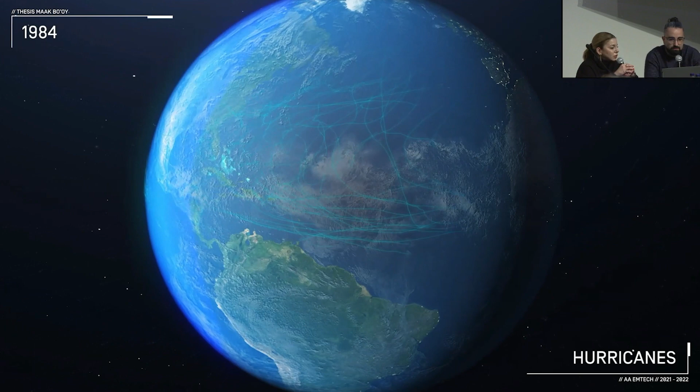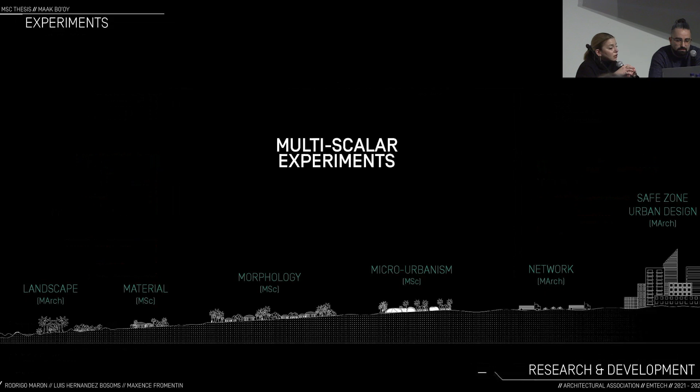This Master of Science dissertation is by Luis Hernandez Bosoms, Rodrigo Maron, and Maxence Fromentin. It's contextualized in the Yucatan Peninsula in Mexico. This specific location faces hurricanes from May to December, and these hurricane events are becoming more devastating every year. While major cities in this peninsula have the tools, infrastructures, and policies to resist them, the indigenous rural Mayan people and their traditional lifestyle are being affected in very negative ways. That was the premise of the research.

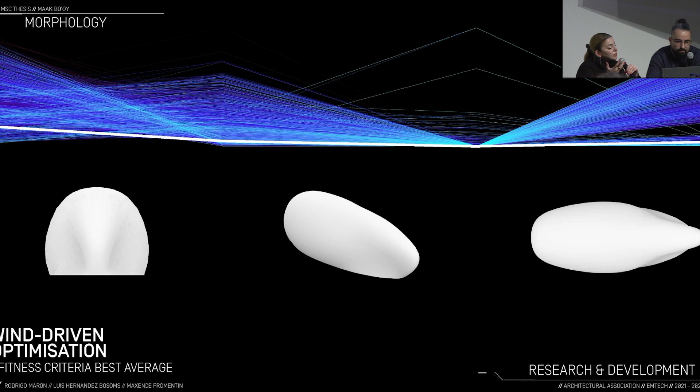The research is conducted on multiple scales. First is the morphological scale that you see here. They investigated a system, basically a habitable system for the Mayans, formed by wind-driven form-finding processes and material experimentation, working with bamboo and bundling of bamboo as a material system.

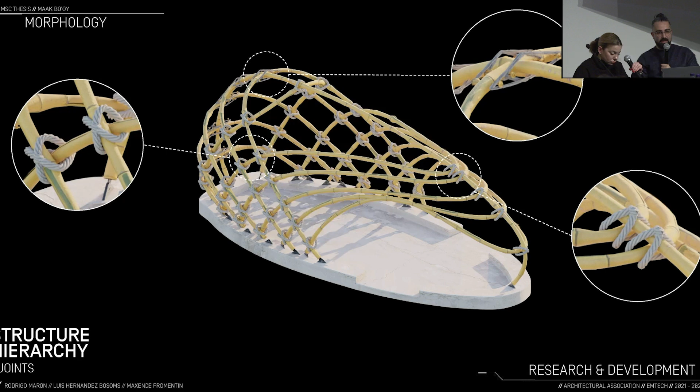One of the key elements in this project was information flow: how to take what has been conducted at a smaller scale and inform the larger scale, and how everything is then tied back together to form a complete project at the end. This was facilitated by the pipeline and workflows we explore here at EmTech.

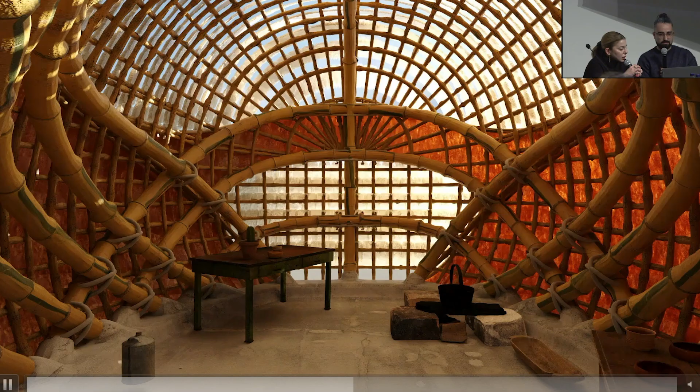Starting from the morphological scale, they then developed a kind of micro-urban scale system, an urban system, where they incorporated the cultural context and the living system and the economical context of the people and their activities, in order to generate a micro-urban living environment.

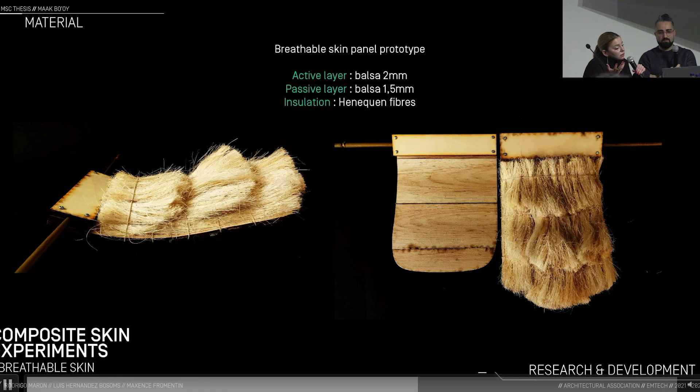At the same time, they also worked on a larger ecological urban framework to create an evacuation system for when these people are faced with these kinds of very risky, large-scale flooding events.

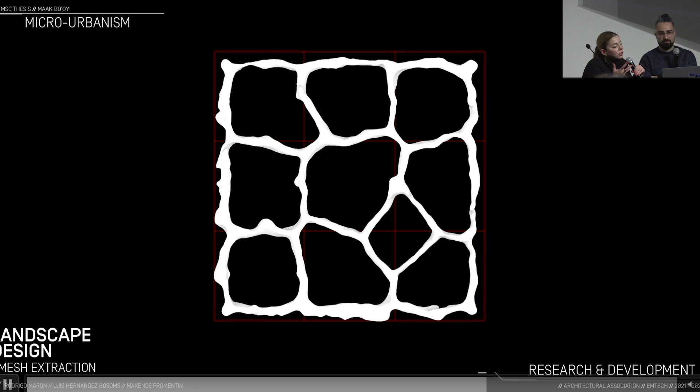This project is actually a very good summary of what we are trying to establish in EmTech: understanding the context, understanding the biome, understanding the challenges of a specific biome—not only environmental or climatic challenges, but also the cultural context, the economical context, how people live, and their building practices—and later trying to relate the traditional building practices with novel technologies, and how these building practices can then impact their cultural context as well as their living context.

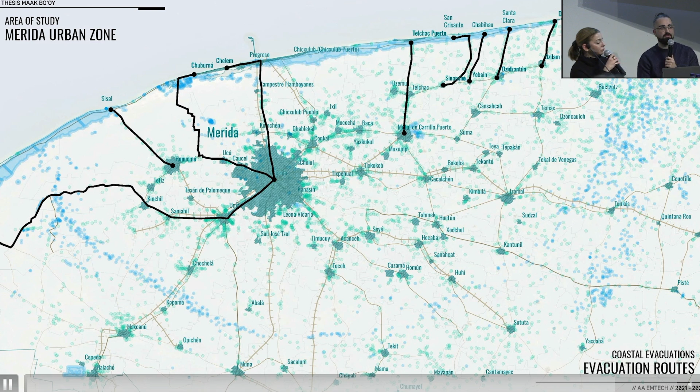This is a clear example of how different scales are investigated all at the same time, with information flowing from one stage to the other. We will end this presentation here. Thank you, guys. Thank you.

Was robotic arms eventually used for the final bundling product? Yes, they were used for final bundling products. That's a very important part of the process because we need to know how much we are bundling. We need to have control over the degree of bundling, when it fails, and how much we can bundle. So that's why we use the robots.

Because I've been looking for a pedestrian simulation plugin for a while now, which is free - just about the sociability hierarchy and the skills you were talking about. If we were to use it in a real project like a master plan, the sociability parameters - is there some sort of documentation or background on what they're based on specifically? Because from what you guys showed, it seemed a bit abstracted, almost a bit black box.

During our thesis, we developed a sort of parameter base for sociability, defining them in a quantitative manner. We used these parameters as a basis for setting those sociability scores for each person. In the plugin itself, it's an input for each agent, so you can always change this score. You can make your own way to come up with this score, choose certain parameters or not, and then input that number specifically yourself. So you kind of drive how social the agents are, and also the global sociability as well.